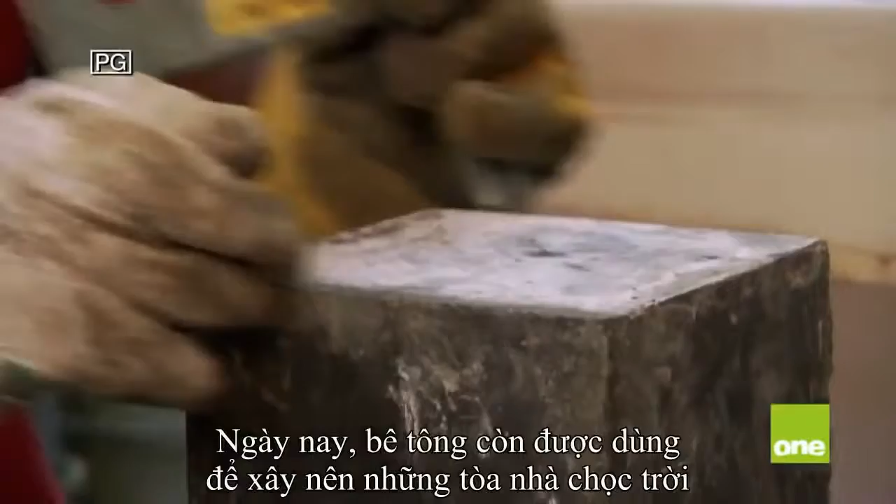Concrete. It's the most used building material on Earth. It was the building block of the Roman Empire. Today, it's the material for a new generation of gravity-defying skyscrapers. The raw ingredients that create this magic formula can be found in nearly every country on Earth.

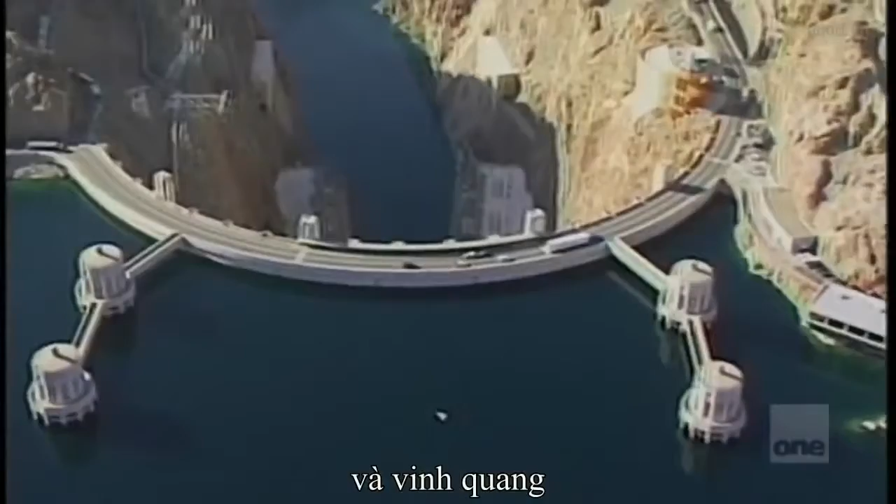Yet how these simple components are mixed together can make the difference between tragedy and triumph. From the mundane to the massive. From the ordinary to the extraordinary. Concrete helped pave the way for innovation and laid the foundation for the world's greatest civilizations. Now, go inside the science of concrete.

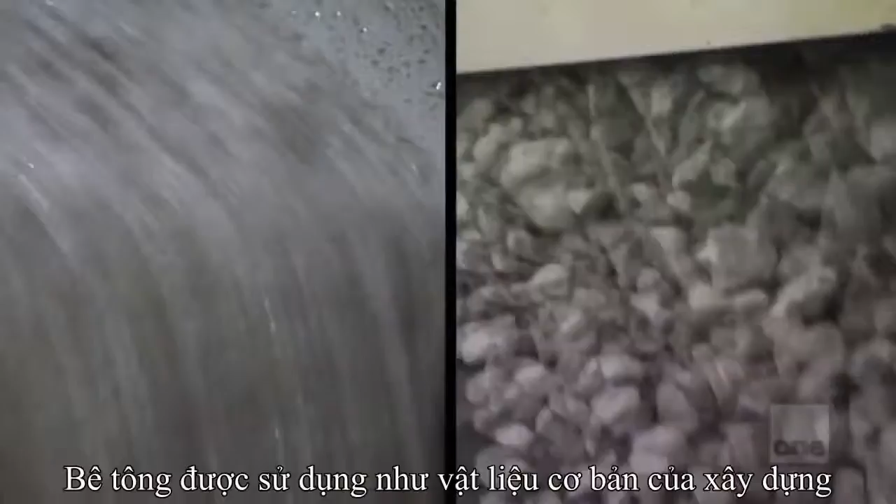It starts out like liquid. When it dries, it becomes stone hard. This amazing metamorphosis has earned concrete the nickname liquid rock. It has served as a cornerstone of engineering for centuries. And it's a highly prized tool of construction for a reason.

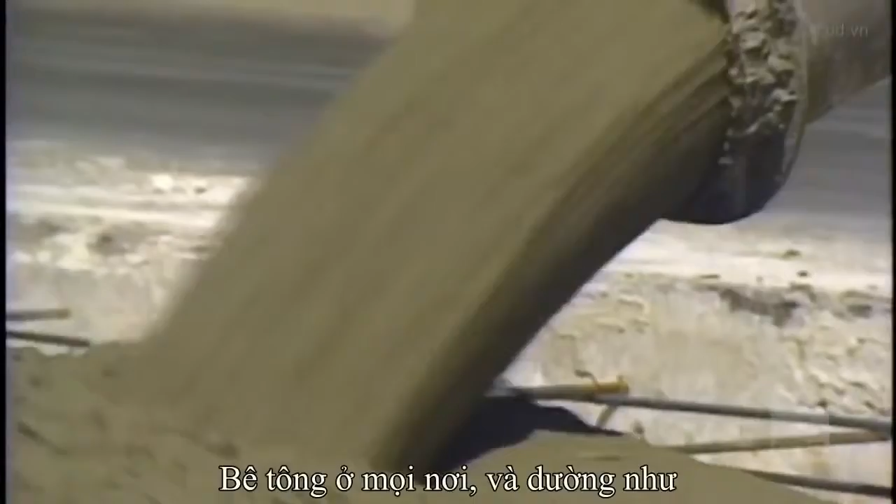It's easy to take concrete for granted. People see it in sidewalks and roads all the time, every day. But in fact, it is the closest thing to a miraculous material in construction that we've ever had. Concrete is everywhere. It has an almost unlimited engineering potential. It can take on nearly any shape and forms the backbone of a variety of the world's construction.

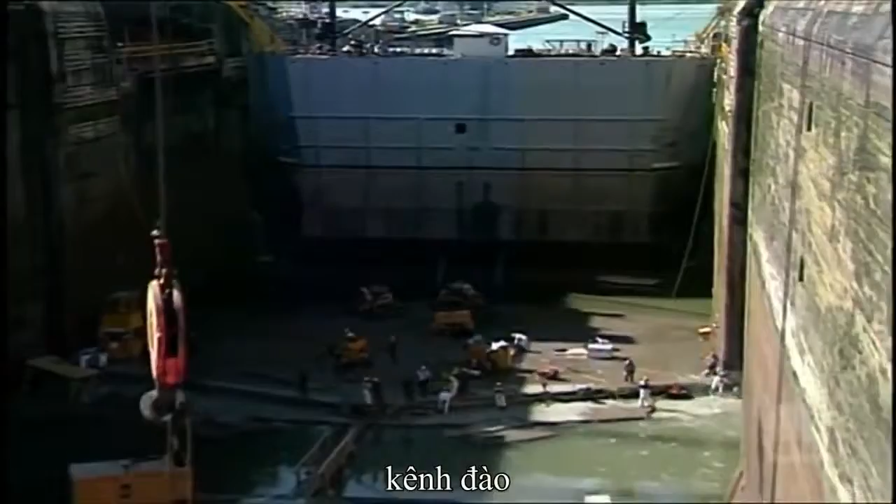Superhighways, massive bridges, man-made waterways, mega dams, the world's tallest skyscrapers. This miracle material begs the question, how does it do it all? I worked on a lot of jobs, and basically they all have a different formula for their concrete. Now I can't imagine the world without concrete.

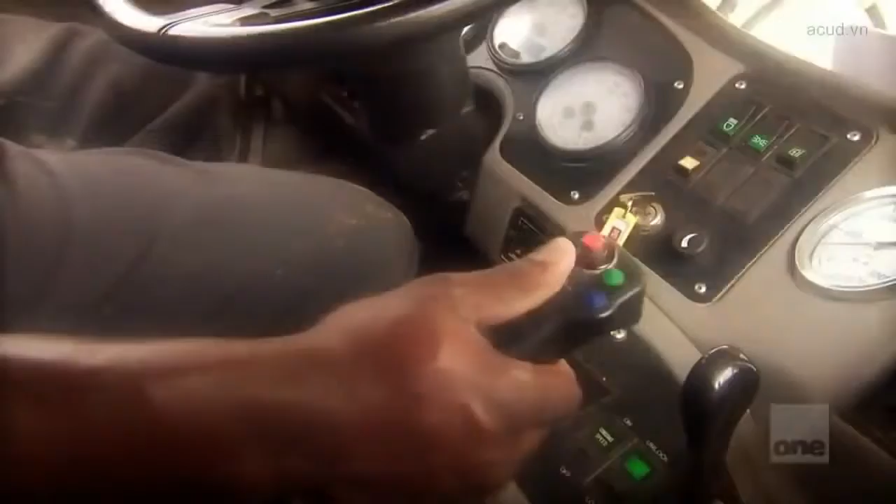The basic formula for concrete is simple. Sand, crushed rock, called aggregate, water, and the heart of the concrete mix, cement. Cement, it is the grey, powdery material that acts as a glue that sticks all of the concrete together. It covers and coats all of the gravel, the sand, and the rock as a way of gluing and binding the whole material together.

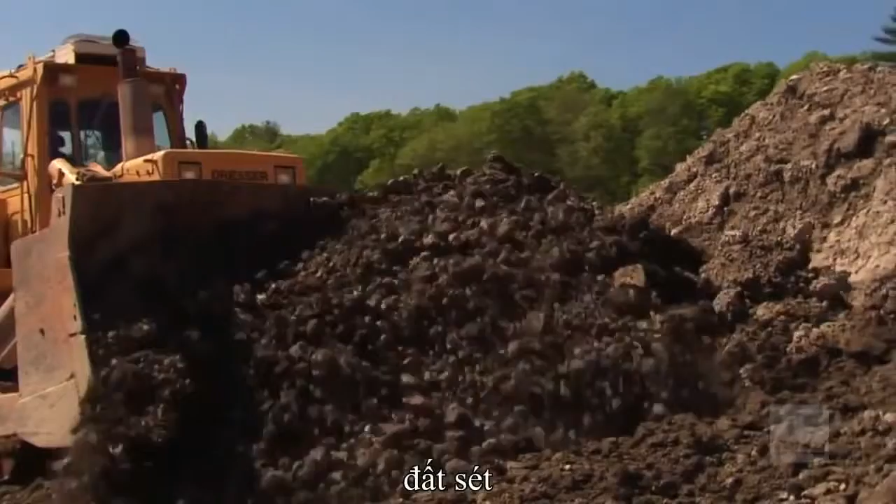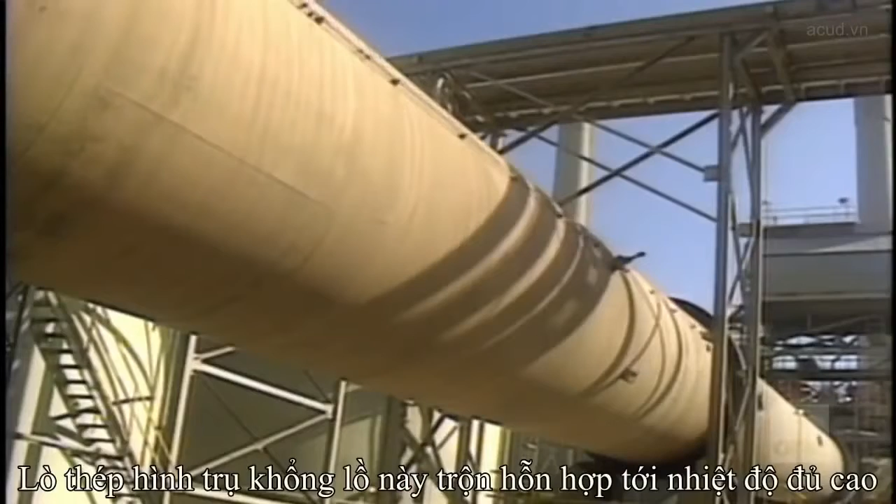To make cement, you need limestone, clay, and other elements like iron. These ingredients are crushed and combined into a powder that's poured into a kiln. The massive cylindrical spinning kilns heat the mixture to a temperature as high as 2,700 degrees Fahrenheit. The mixture becomes partially molten, forming a new marble-sized component called clinker. Once cooled, machines grind clinker into a superfine powder we know as cement.

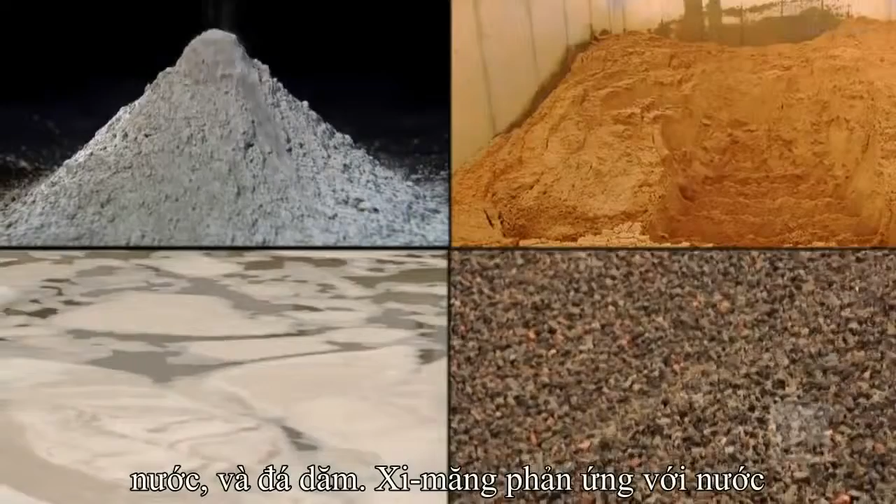Cement binds the ingredients together. When added to sand, water, and crushed rock, the cement reacts, linking the raw elements into one powerful whole. Water is the key. When cement reacts to the water, it undergoes a transformation called hydration. During this reaction, a node forms on the surface of each cement particle. The node grows and expands, linking up with other nodes. It sticks to the crushed rock and sand in the mix. Cement binds these ingredients. As it solidifies, concrete becomes a building block of modern construction.

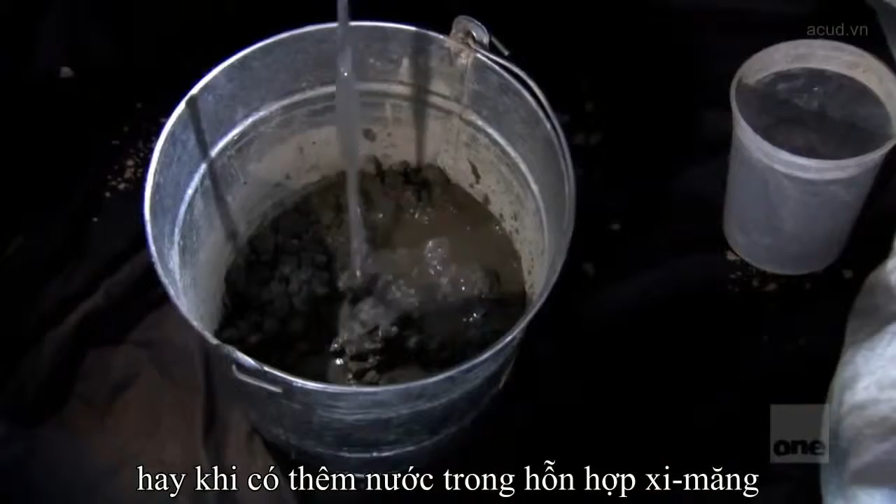The water actually allows a chemical reaction in the cement to allow it to harden. People often think that concrete hardens by drying. It actually hardens by hydrating or getting more wet. The water in the cement mixes with a lot of the minerals and chemicals that are in the cement, and by that mixture forms a new compound which then hardens. This basic process hasn't changed in over a century.

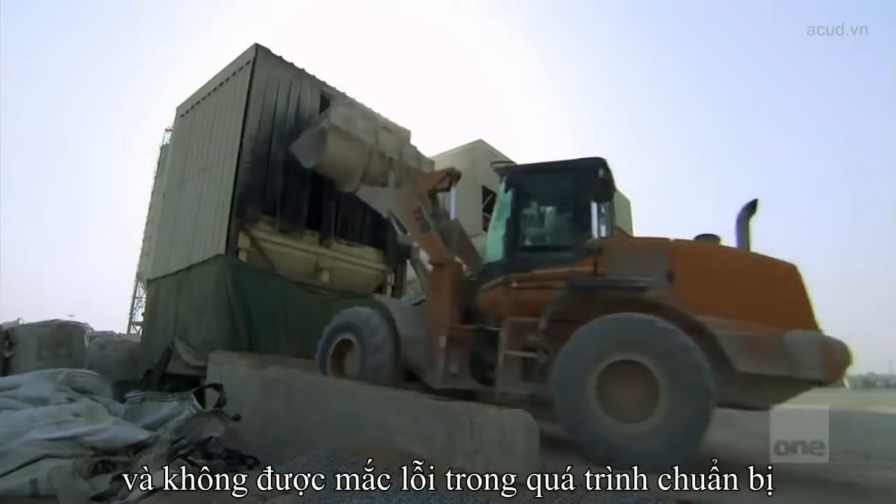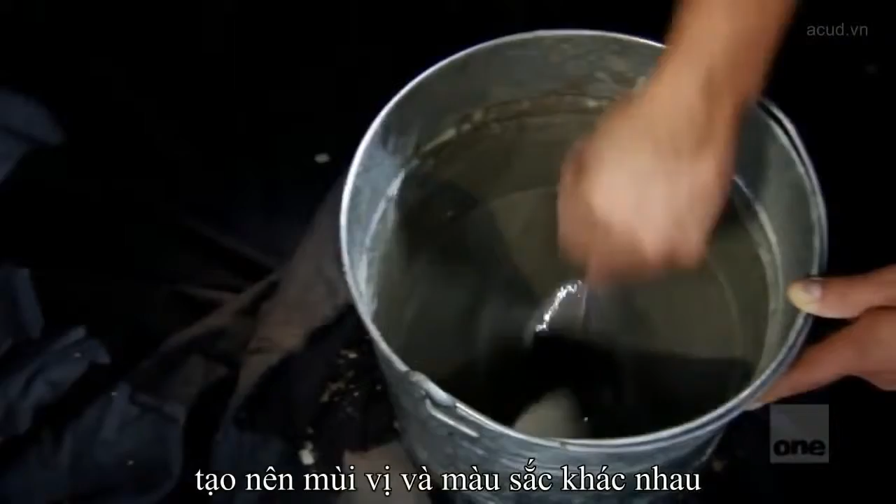But creating concrete is no simple matter. Making the right recipe requires precision and flawless preparation. It is a synergy of ingredients and timing. In a way, making concrete is like making a cake. There are lots of different recipes to make a cake. You get different flavors, different colors, different textures, but there are also lots of ways that you can make a cake wrong. It's not going to set properly, or it can come out in a way that's very different from your intentions. Getting the recipe right is everything, and the consequences of a flawed mix can be deadly.

The residents of Mexico City learned this the hard way. On September 19th, 1985, the Mexican capital is rocked by an 8.1 magnitude earthquake. It causes up to $5 billion in damages. Investigation of the rubble reveals that many of the buildings had been made of a substandard concrete.

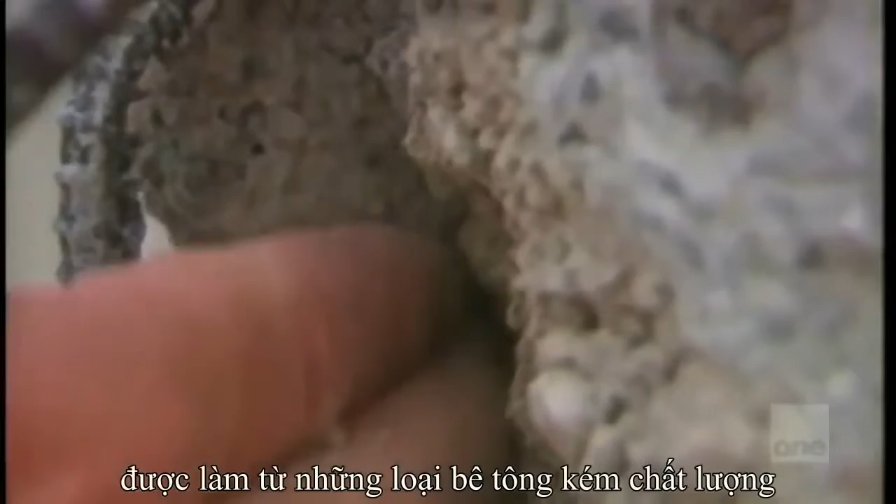Yes, we saw examples after the Mexican earthquake where when you use inferior concrete and you skimp on the rebar, and we saw both extensively in Mexico City, the concrete doesn't have its expected strength. The result is walls would fracture and shear and the building would collapse, when the expectation would have been that the building should have easily survived to preserve health and safety. The consequences of this quake are tragic. An estimated 10,000 die. Another 50,000 are injured.

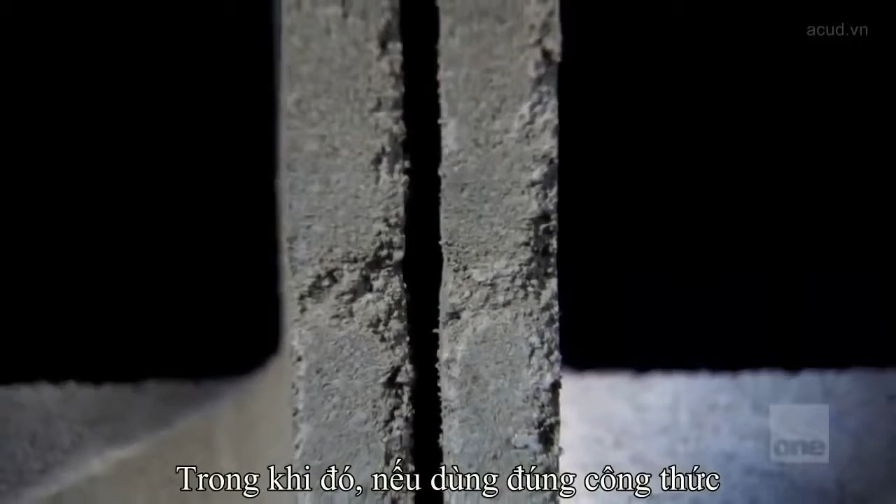But with the right formula, structures made of concrete can endure thousands of years. The ingredients for concrete have stayed the same for centuries. But there has always been room for innovation. With special ingredients and slight adjustments to the formula, concrete can adapt to the challenge of a specific project.

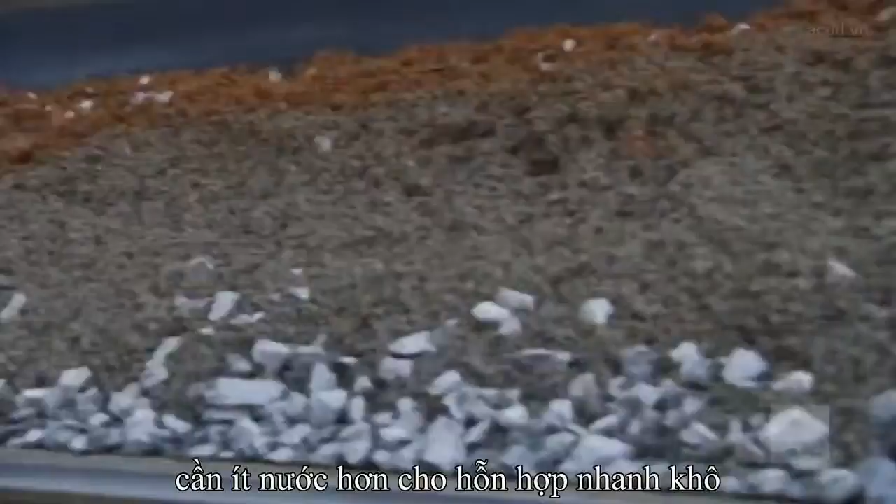Want a dam to hold back 52 million gallons of water? Add more aggregate to the formula to create a concrete with greater density. Want to create the foundation of an epic skyscraper? Add less water for a faster drying mixture. The array of different recipes is virtually infinite.

The hunt for the right formula for a specific project is nothing new. The search for the strongest and most durable recipe goes back thousands of years. Although other civilizations, including the Egyptians, experiment with concrete, the Romans transform it from a supporting material to a main substance. In Rome, liquid rock fuels the dreams of an empire.

The word concrete even originates in Rome. From the Latin concretus, it means grown together or compounded. Roman concrete contains the traditional ingredients of sand, water, and crushed rock. But volcanic ash from the hills of Pozzuoli, Italy, transforms the material.

The Romans were very astute architects and engineers, and they recognized that by mixing volcanic ash from near Pozzuoli in Italy, they were able to get a concrete that became very hard. This volcanic ash proves to be an adhesive binding agent. It gives ancient Rome a powerfully strong concrete.

This innovation allows the Romans to craft an empire from the ground up. Concrete becomes the backbone of a dizzying array of structures, aqueducts, bathhouses, and markets. But today, one structure alone stands as a unique testament to the power of ancient Roman concrete: the Pantheon.

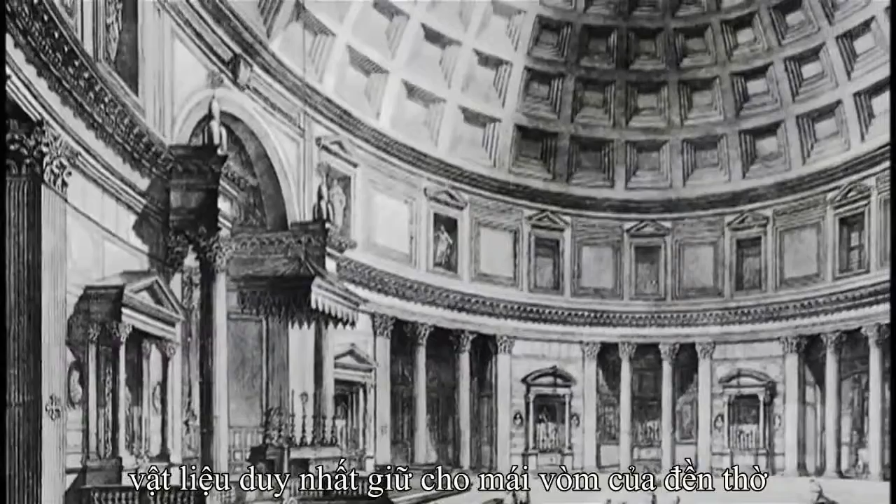This former temple to the Roman gods combines elements of engineering and design, and nowhere is that more apparent than in this concrete dome. Stretching 142 feet in diameter, it is the largest surviving dome from the ancient world. It was the largest dome in Western Europe until the 15th century. Unlike modern-day domes, which are generally reinforced, the only material holding the dome of the Pantheon together is Roman concrete.

Constructing an unreinforced concrete dome on the scale of the Pantheon is just an incredible engineering achievement. You couldn't do something today because everybody would have appraised the odds of your success as so small as you would never get a chance to do it.

There's actually 7 different types of concrete used in the construction of the Pantheon Dome. And the way they distributed their aggregate and changed the composition of their concrete so that the areas that had to take tremendous compressive loads, like the weight of the dome at the base, the aggregate is huge, 9, 10-inch rocks. But as the dome gets near the top, of course, there's less weight, so they switch over to pumice. Near the top ring is very high pumice content, almost 80, 90% pumice to make it lighter.

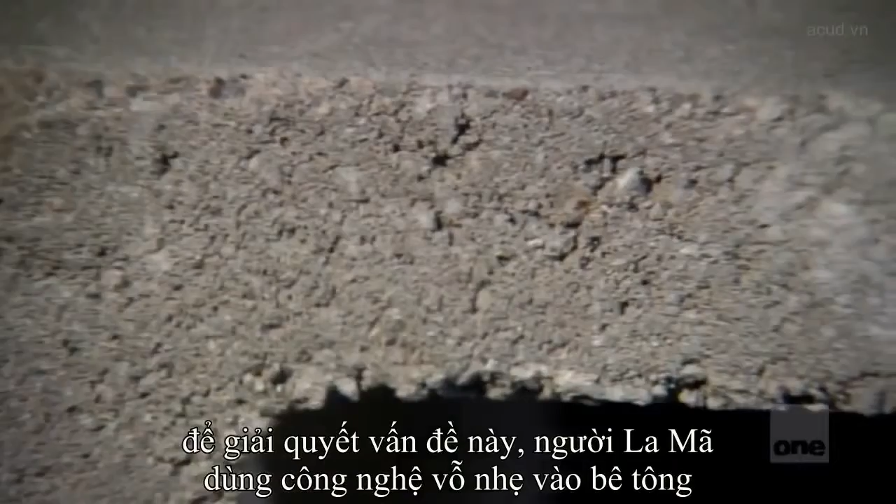It is the Romans' ability to modify the formula for each stage of the dome's construction that allows it to stand to this day. The Romans also faced an immense engineering challenge: air bubbles. Pockets of air can form in the concrete during a pour. When the water dissipates, these holes can lead to cracking. To solve this problem, the Romans tamped or tapped the concrete, avoiding the need for excess water. By removing the air bubbles, the Romans increased the dome's strength and stability.

The Romans also wanted to reduce the overall stress on the dome. To do this, they created sunken panels called coffers. These panels are decorative, but also take weight off the dome. They are a synergy of architecture and engineering.

However, there is one feature that stands out in the Pantheon's design. The dome's interior was designed to look like the Roman heavens. It features an interior circle called an oculus, or great eye, representing the sun. 27 feet across, the oculus is the source of all light for the Pantheon.

The oculus reduces the amount of weight and stress at the center of the dome, giving the whole structure added durability and strength. It is an engineering marvel. The dome of the Pantheon is a stunning example of how Roman concrete could be built to last.

Each layer of the dome becomes less dense the closer it gets to the top. At its weakest point, the Romans designed an oculus which reduced weight and stress. These innovations continue to impress engineers almost 2,000 years later. For 1,500 years, that was the largest dome ever built by man. There aren't many engineered structures that stand that kind of record of time.

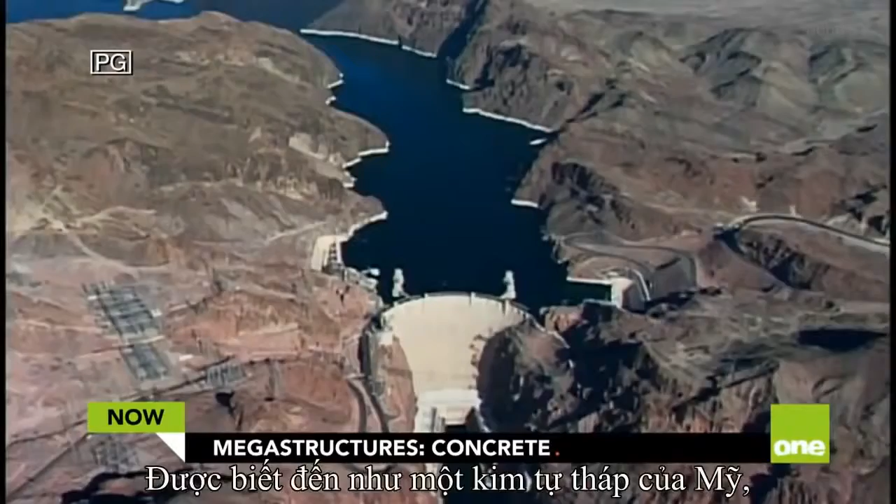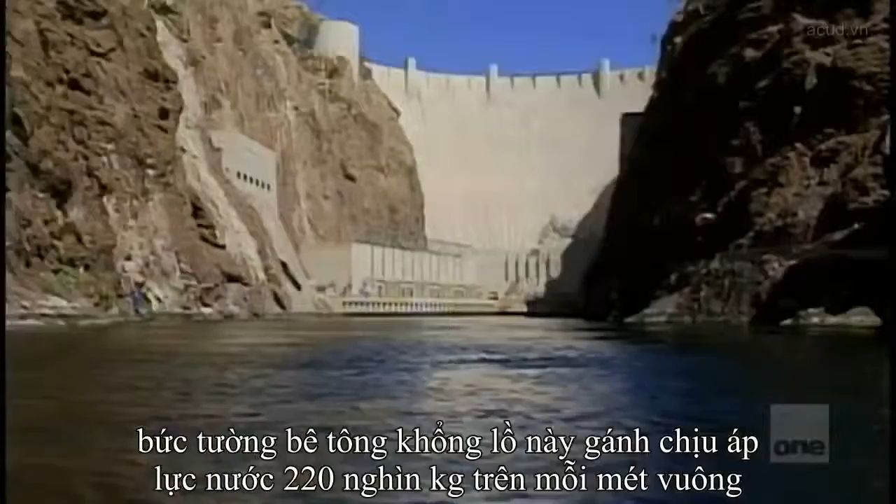It has been called an American pyramid. The mighty Hoover Dam is a testament to the power of concrete. Weighing 6,600,000 tons, this concrete colossus holds back 45,000 pounds of water per square foot. The force of this water generates hydroelectric power for over 1 million people.

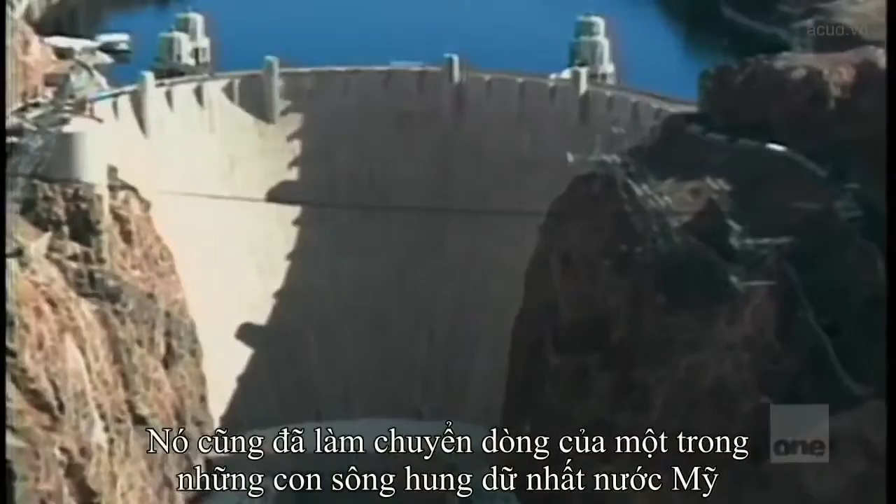From the neon lights of Las Vegas to the freeways of Los Angeles, this hydroelectric dam generates 2,080 megawatts of electricity. The Hoover Dam's construction redefined what the world could do with concrete, but it also rerouted one of America's wildest rivers, flooding ancient canyons, reshaping the area's natural habitat.

In 1905, the Colorado River breaks free of a man-made canal. It floods Lower California across 150 square miles. Epic floods wipe out thousands of farmers. Millions of dollars are lost. The Colorado is unpredictable.

The Southwest also has another problem: power. The boom towns of Los Angeles and Phoenix are growing at a rapid rate and desperately need energy. Raging floods and lack of power. Two different problems. But engineers believe there is one answer to both: dam the Colorado River.

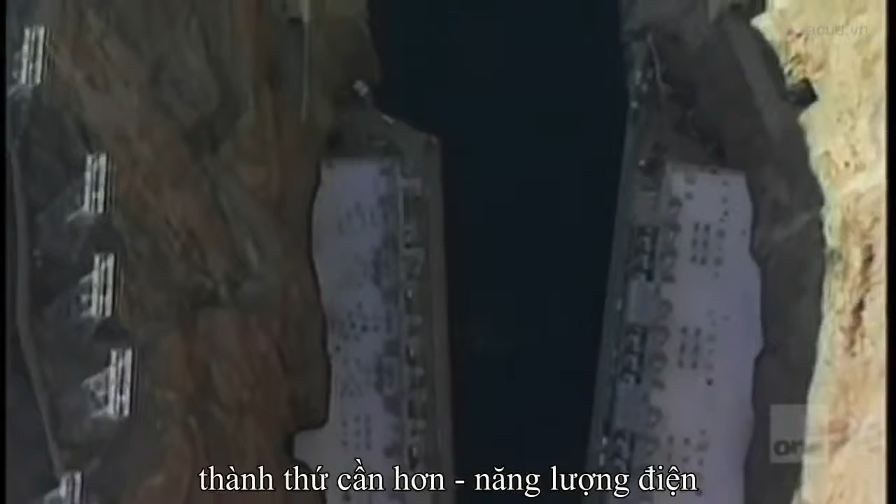A hydroelectric plant would harness the natural power of the Colorado and, using simple mechanics, convert that energy into much-needed electricity. You're generally looking in the construction of a dam for a huge, solid structure. It's really about holding back enormous quantities of water. The dam needs a material that is strong enough to hold back the raging Colorado. And since the location would be remote, able to be made on site.

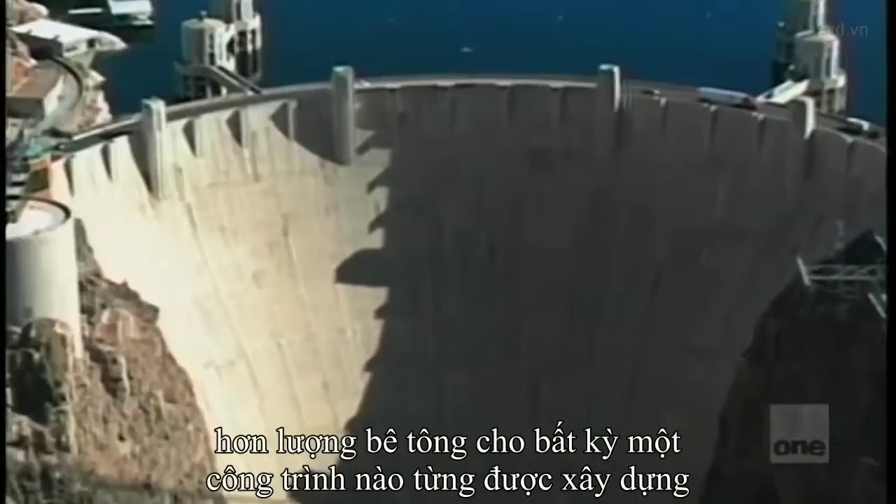One material can meet all of those requirements. It's hard to imagine the Hoover Dam being built out of any material other than concrete. Using steel on this scale would be too costly. But to make the Hoover Dam, engineers would need more concrete than had ever been used before in one project. The dam will be 726 feet high and 1,244 feet wide.

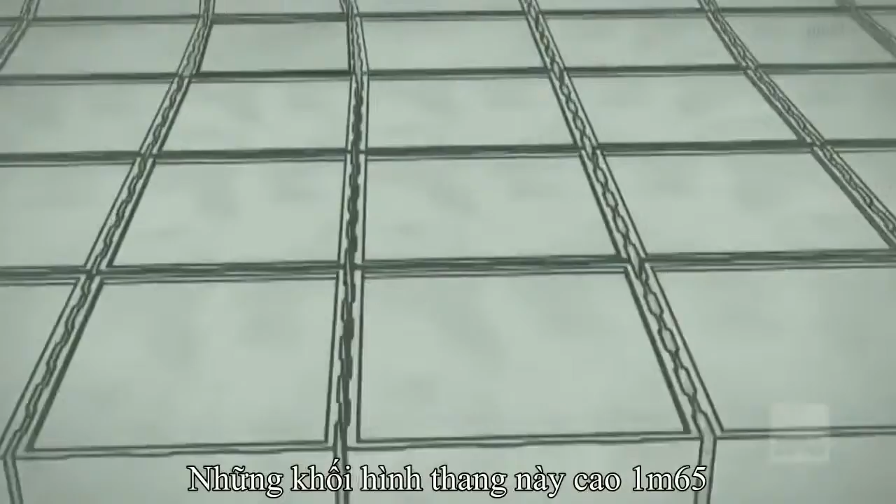With a structure this big, it will be impossible to do one massive pour of concrete. The amount of material that went into this dam was so enormous that there's no way to pour the concrete in one segment. So what they did is they divided the whole dam into lifts and then into individual blocks. The Hoover Dam needs to be built as a series of individual blocks that will interconnect. Trapezoidal in shape, the blocks rise in 5-foot lifts. This crucial engineering element allows the project to progress in stages.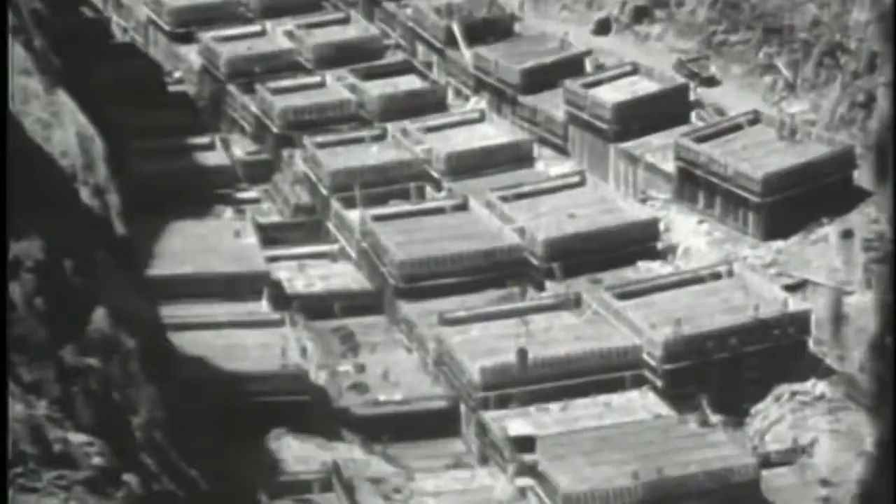Something on that scale being built in concrete had not been built before. Hundreds of pounds per square inch, thousands of pounds per square foot on the base of the dam, trying to push the dam downriver. And now you've got the Hoover Dam to stand this incredible water pressure trying to push it down the river. Chief Engineer Frank Crowe knows the completed dam will have to hold back 45,000 pounds per square foot of water. For this, they need a special high-strength formula.

Crowe's solution? A minor but crucial modification to the standard concrete formula. A very dry mix, one that uses less water. More water makes it more workable, but shrinks more, and shrinkage causes cracks. The less water, down to 7%, the better and stronger the concrete.

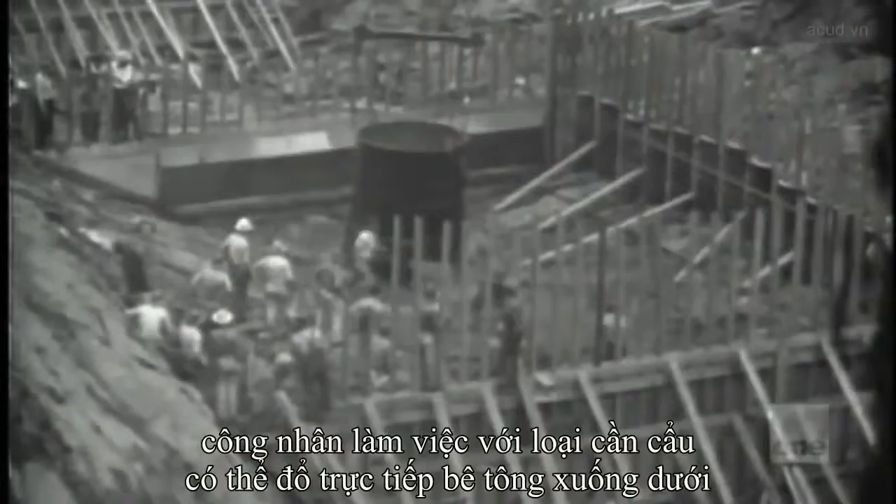The dam's remote location also means crews will have to build 2 concrete mixing plants on site. Shipping a very dry concrete formula from a facility far away would render it useless by the time it's transported to the dam. Because speed is of the essence when working with a very dry concrete mix, the crews working the pouring cranes have to push themselves to the limit to pour quickly and accurately.

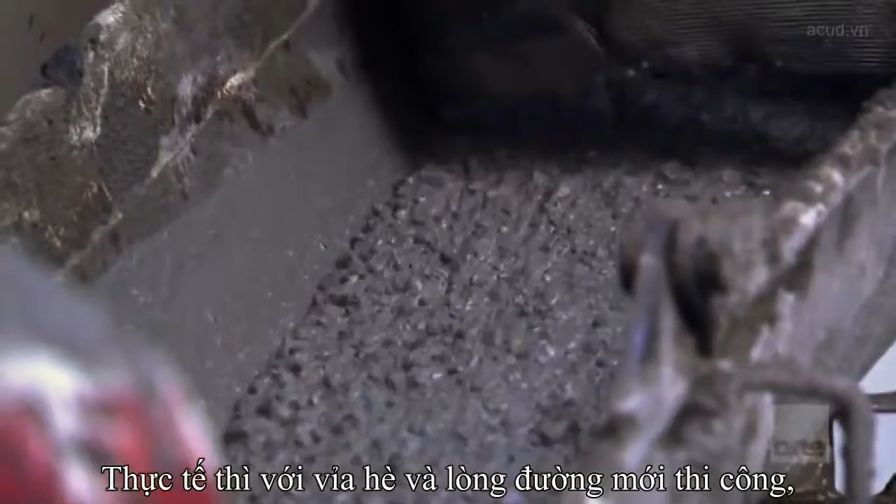Now go back inside the science of concrete. The process by which concrete cures, we call an exothermic reaction. By that I mean it gives off heat. And indeed, if someone pours a sidewalk or driveway around you, right after the slab dries enough to touch, put your hand on it. It'll feel warm. That's exothermic, it gives off heat. You can feel sensible heat.

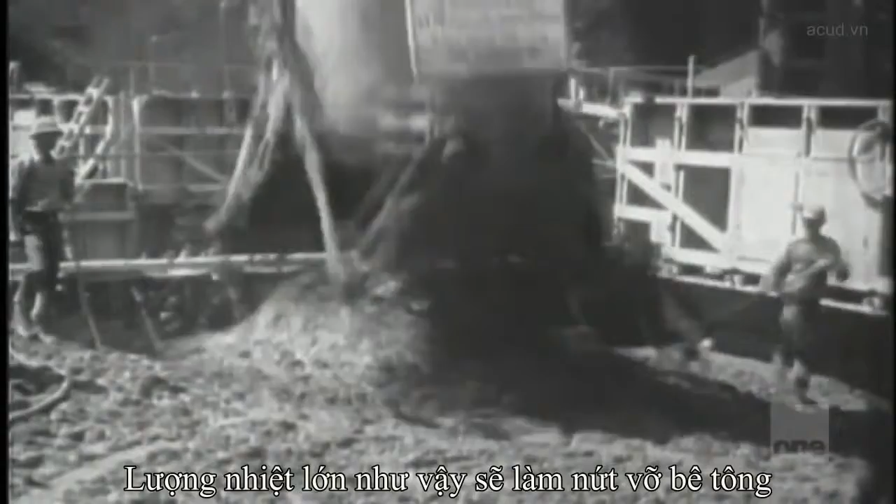As the amount of concrete going through this chemical reaction gets bigger and bigger, the amount of heat that's given off gets bigger and bigger. Engineers calculate that if the dam were built in one continuous pour, the concrete would get so hot that it would take 125 years for it to cool to normal temperatures. The extreme heat would also cause the concrete to crack and crumble away.

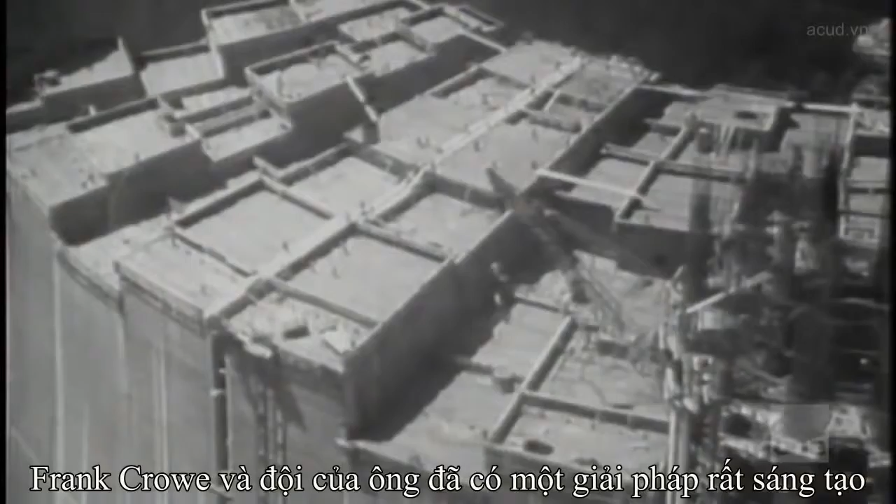Concrete dries from the outside in. If the concrete is not evenly cooled, it can crack, putting the stability of the whole structure at risk. Instead, Frank Crowe and his team of engineers have an innovative solution. Each block is outfitted with coils of thin-walled steel pipe. When the concrete is first poured, water from the Colorado River circulates through these pipes.

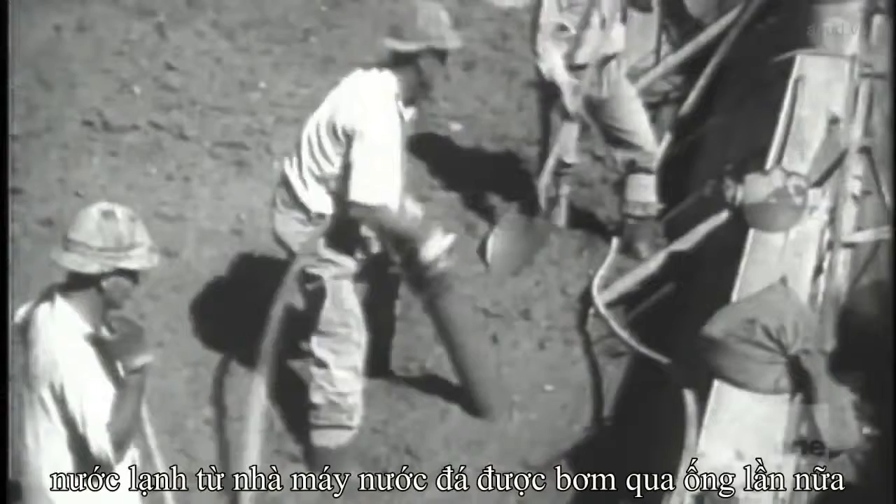The idea is to initiate a cooling process, but one done in stages. Cooling the concrete too quickly will cause it to crack. After the concrete has received its initial cooling, chilled water from a refrigeration plant is circulated through the coils to finish the cooling process. As each block is cooled, the pipes are cut off, and they are filled with grout by pneumatic grout guns, pumping 300 pounds per square inch of filler.

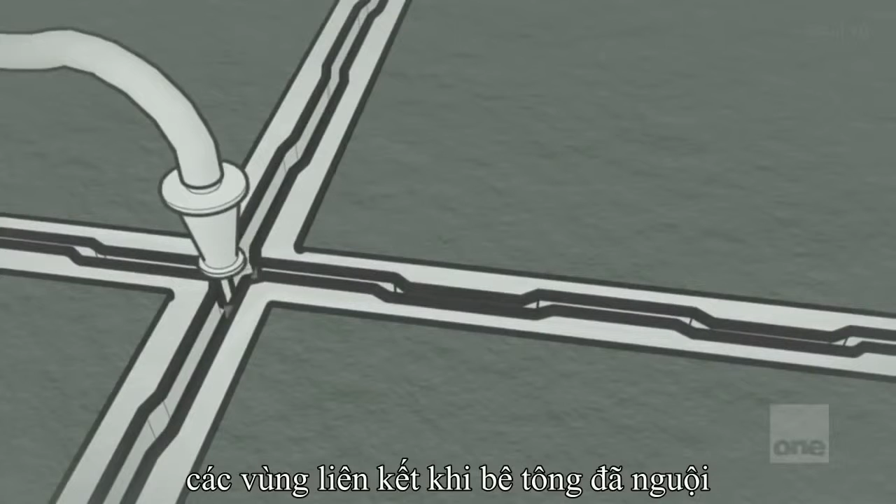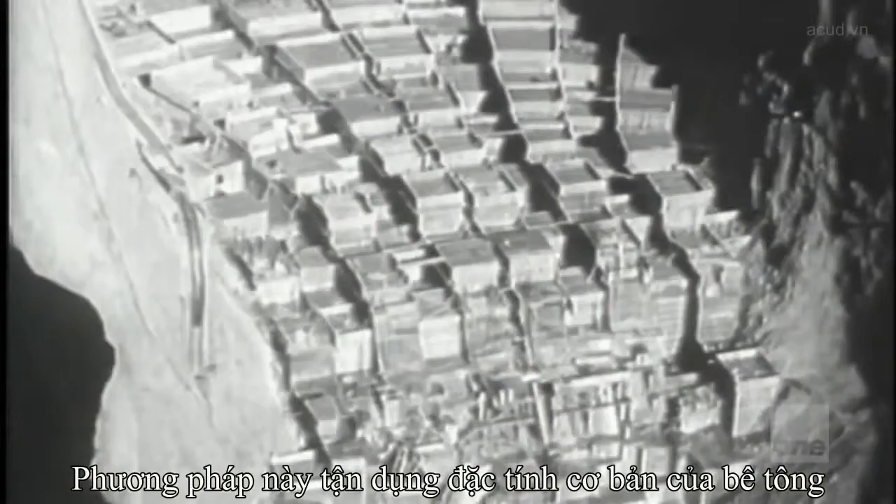Once the individual blocks have cooled and set, there is one final challenge. In order to prevent the hairline fissures between the blocks from weakening the dam, the individual blocks are formed with vertical interlocking grooves. When the concrete has cooled, grout is forced into these joints, bonding the entire structure into a monolithic concrete giant. This method takes advantage of one of concrete's fundamental properties. Concrete as a material is very strong in compression.

To build a structure, to make sure that the concrete is all in compression, you bend the beam like this, so now the water pushes on an arch. Well, what's the water trying to do? It's trying to push that through. Well, it's the Pantheon Dome again. Only this time it's the water trying to do it. It's trying to push the dome through the river gorge. What that does is put the whole structure in compression.

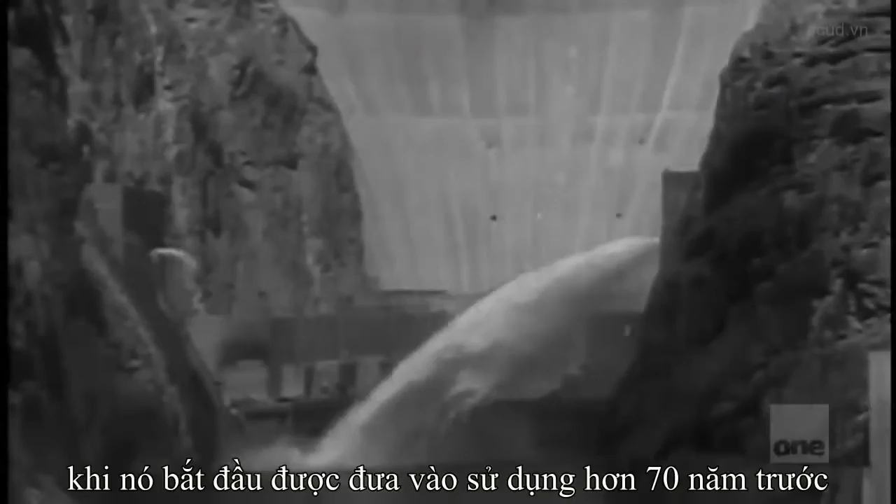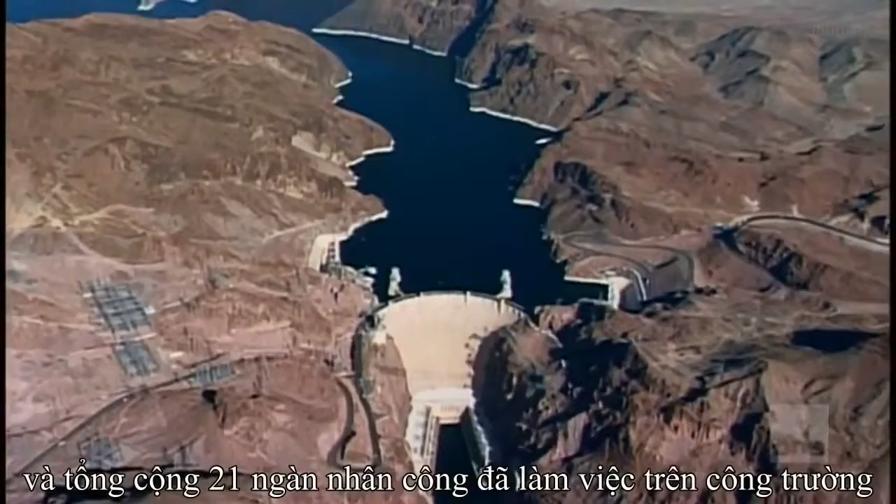Well, concrete loves compression. The more it is forced together while setting, the stronger concrete becomes. As a result of this property, the Hoover Dam is arguably stronger today than it was on opening day, 70 years ago. The Hoover Dam is a testament to engineering know-how and a skillful use of concrete. The dam contains enough concrete to pave a strip 16 feet wide and 8 inches thick from San Francisco to New York. More than 5 million barrels of cement were used in the Hoover Dam, and a total of 21,000 men worked on its construction.

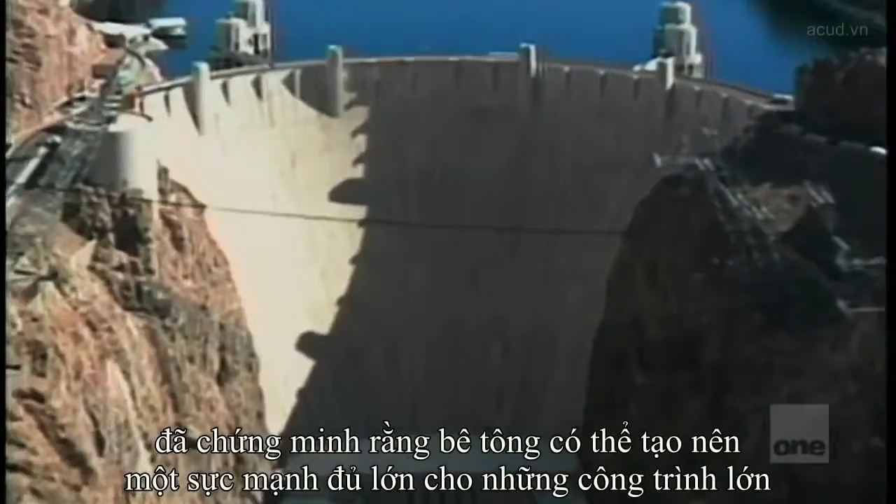And it represented an enormous engineering achievement to build successfully. It took the lives of over 100 men to build that dam. Today, the concrete mega dam is nothing new. But Hoover set the stage and showed the world that concrete could do the job and help generate much needed power. It changed the course of one of America's wildest rivers. Now the question is, can concrete conquer the skies? Now go back inside the science of concrete.

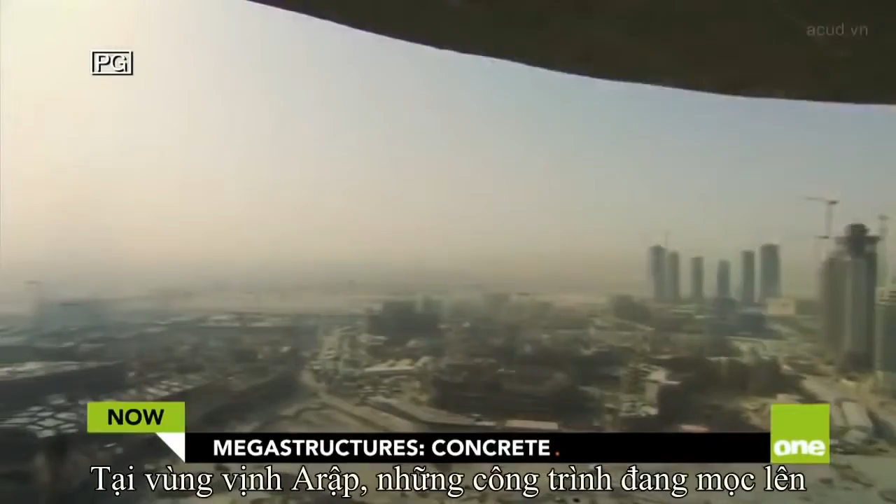In the scorching Arabian Gulf, a growing structure cuts the horizon. Its expected height is a closely guarded secret, but experts around the world agree the Burj Dubai may be the world's tallest skyscraper. It'll be the tallest building, for sure, the overall title holder for some time to come. A construction project this massive needs 11 cranes and the world's fastest high-capacity construction elevators. The building rises at the breakneck pace of 1 floor every 3 days. And from the walls to the floors, to the columns to the stairs, much of this desert skyscraper is concrete. More than 160,000 cubic meters of it.

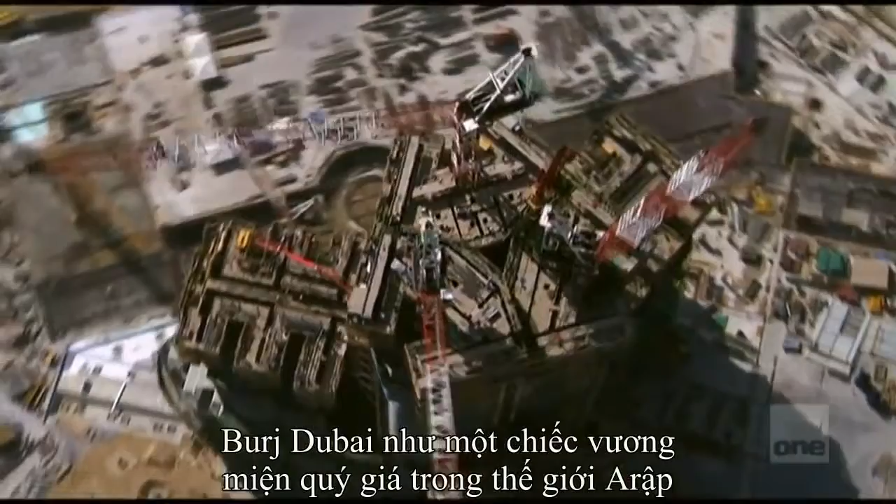At more than 2,000 feet, the Burj Dubai will be the crown jewel of the United Arab Emirates and is a shining example of a new generation of skyscrapers that seek to dominate the skies. It is a far cry from the humble beginnings of the concrete skyscraper, more than a century ago. At the beginning of the 20th century, the building material of choice was not concrete, but steel. You can build a hell of a skyscraper with steel. In fact, the Empire State Building is so overbuilt, you could probably add another 30 stories to it under today's building codes, and it would still comply fine.

So steel was a great material. You can build a great building from steel, but it's an expensive way to go. And steel is not only costly, but represents a challenge for a new generation of skyscrapers that grow increasingly higher. And if you're going to go tall, the building's got to be stiff. It is so much easier to make those thick, stiff walls from reinforced concrete than steel that it's a no-brainer. The Petronas towers in Malaysia are concrete, and this new one in Dubai is going to be concrete. If you're going to go that high, it's going to be concrete.

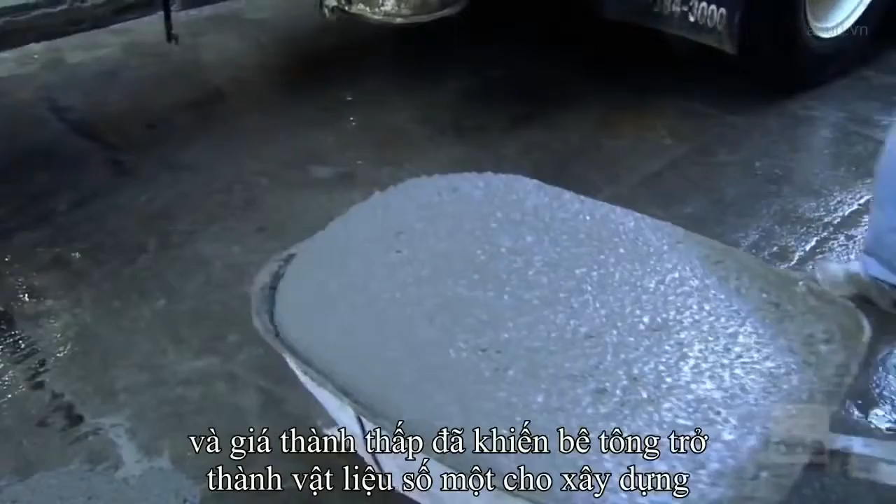The stiffness of concrete, combined with its availability and relatively low cost, have made it the building material of choice for these new skyscrapers. As our experience and comfort level with reinforced concrete came along, and as the buildings started getting taller, reinforced concrete really became the material of choice.

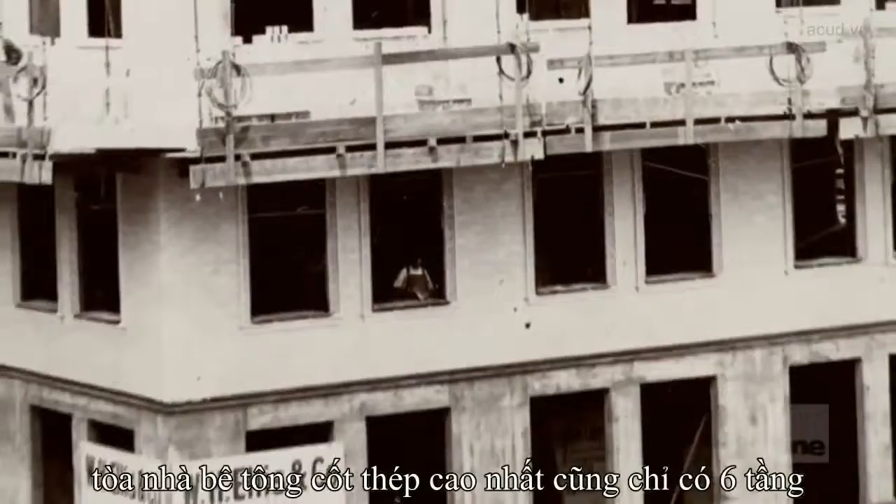Before 1902, the tallest steel reinforced concrete building is a paltry 6 stories tall. The Ingalls building in Cincinnati changes that. Engineer Henry Hooper dreams of a monolithic building of concrete, a skyscraper 16 stories tall. But many engineers believe that a concrete tower 16 stories high will collapse under strong winds or even its own weight. When Hooper finishes his building, there are many skeptics.

There's one anecdote that says that a reporter actually stayed up all night waiting for the Ingalls building to collapse because he was so certain that it was going to. Needless to say, the reporter was disappointed in the end. It is a towering success for its time. But at 180 feet, it is just one in a dizzying array of modern-day skyscrapers. More than a century later, the towering dream of Dubai aims to be over 10 times the size of the Ingalls building.

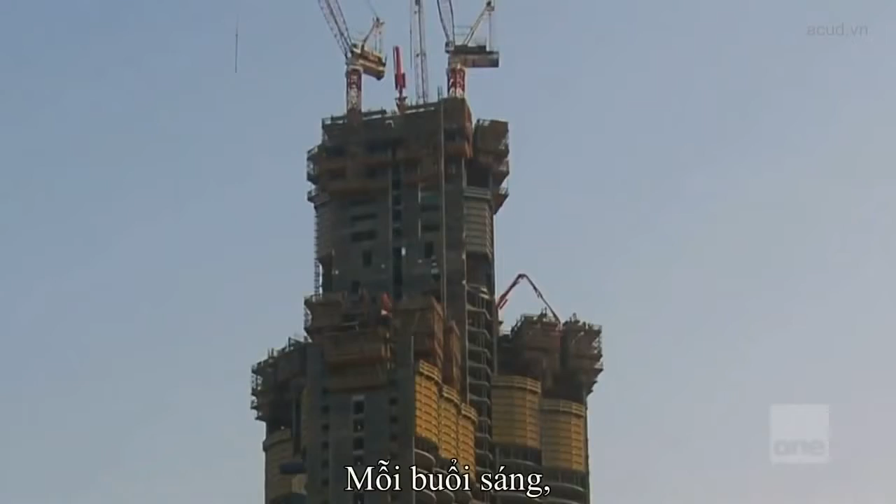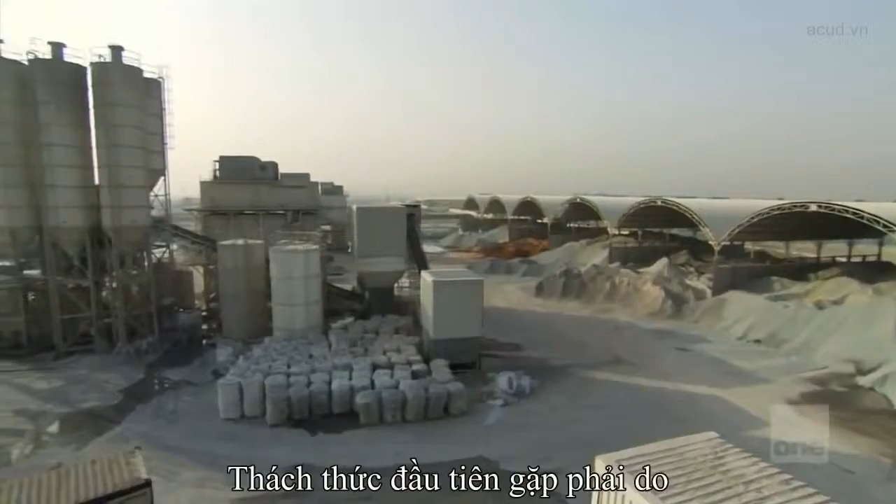Every morning, workers assemble in the garage of the building. Erecting this much concrete in the punishing heat of the Gulf requires serious manpower. But before workers can pour a drop, the perfect formula needs to be mixed at the batch plant. The first problem this leviathan from the desert faces is its own height. The taller a building, the more it flexes, increasing the likelihood that it could flex to the breaking point, a deadly proposition. Older skyscrapers like the Empire State are safe because they use massive steel beams and braces. But erecting a tower nearly twice as high requires a material with even greater shock-absorbing qualities.

If you take something like the Empire State Building and the wind blows on the Empire State Building, well, the wind creates pressure, which are going to try and bend the Empire State Building over. But as you go higher, imagine now going twice the height of the Empire State Building. The wind gets more surface to work on. Indeed, buildings collapse when the flex is so great that the weight of the building gets outside of its footprint and the building doesn't have strength enough to handle that. Down it comes. Now go back inside the science of concrete.

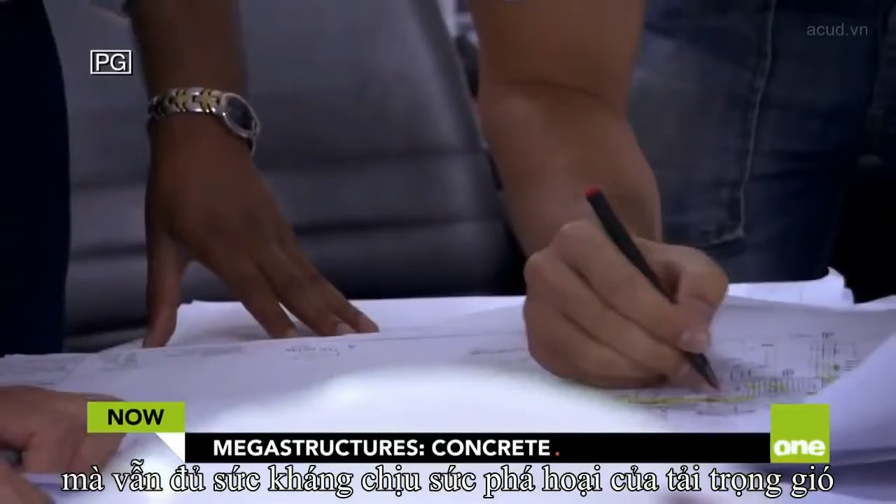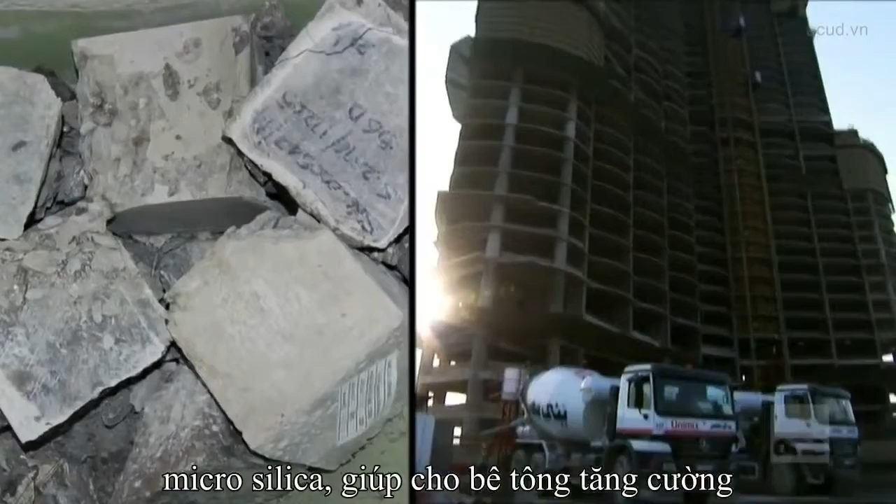Builders will need a formula that is almost as strong as cast iron, yet more resistant to damage due to vibrations from the wind. After extensive computer and wind tunnel testing, the architects behind the Burj Dubai will use a high-strength concrete formula. It contains slag, a byproduct of the steel industry, and microsilica, which gives the concrete added strength. If you look at the microstructure of concrete, there are many, many spaces between the particles that are either hollow, so we call them pores, or they are filled with water. Microsilica plays the role of filling these pore spaces, and therefore it makes concrete much more dense, more durable, and stronger.

And in order to make sure that the formula is consistent, Alam Feroz, quality control manager for the concrete of the Burj Dubai, routinely tests the concrete before it is used in the skyscraper. I'll give you an example. It's like if you're giving blood to a patient, how important is the blood to be tested before you give it to the patient? It's a big risk. So same is with the concrete. When it has been tested, I get confident that whatever I'm giving to the structure has been tested and it complies to the requirements. It won't be just a mere guess.

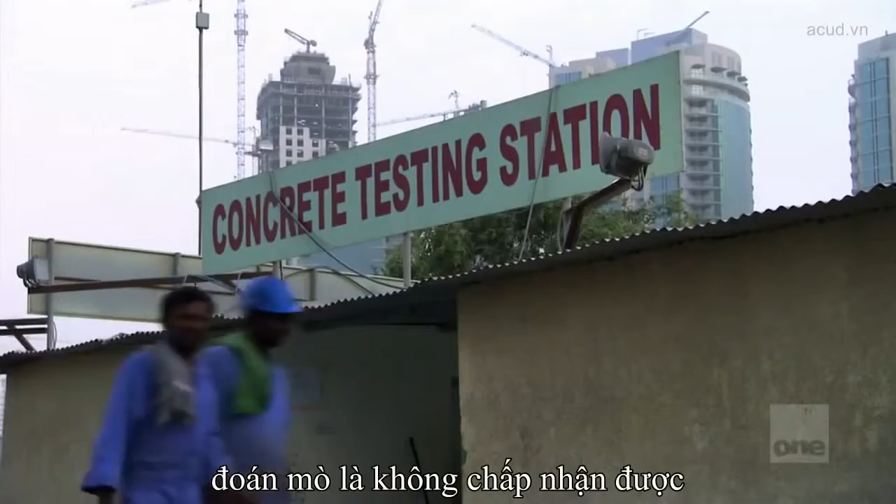To test the strength of the concrete, small cubes are hardened in cool water. Next, the concrete is deposited into a crusher for a stress test. This cube holds up to nearly 14,000 pounds per square inch, making it a high-strength concrete. The concrete test has been successful. But as strong as this formula is, it still has to contend with desert heat.

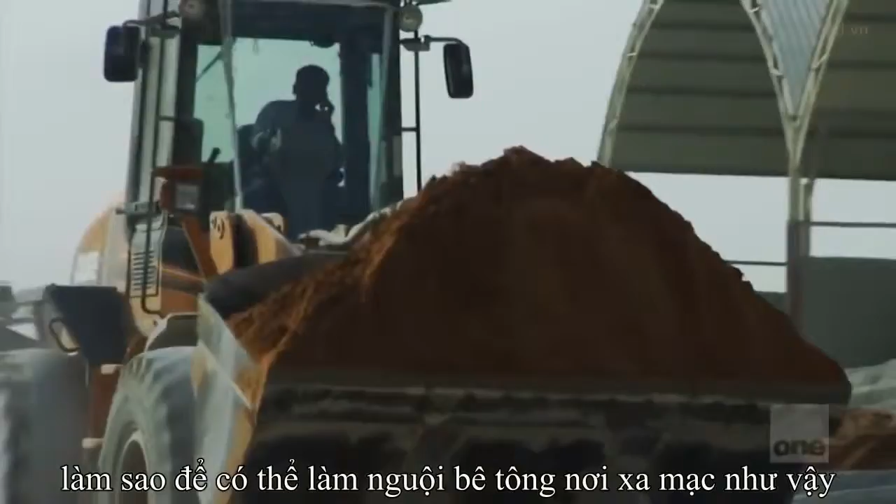Temperatures top 120 degrees. How do you keep concrete cool in the desert? Builders use a deceptively simple technique: shaved ice. While it's being mixed at the batch plant, slices of ice are mixed into the concrete so that it remains cool inside of the mix trucks. When it arrives at the building site, the melted ice has kept the concrete from overheating.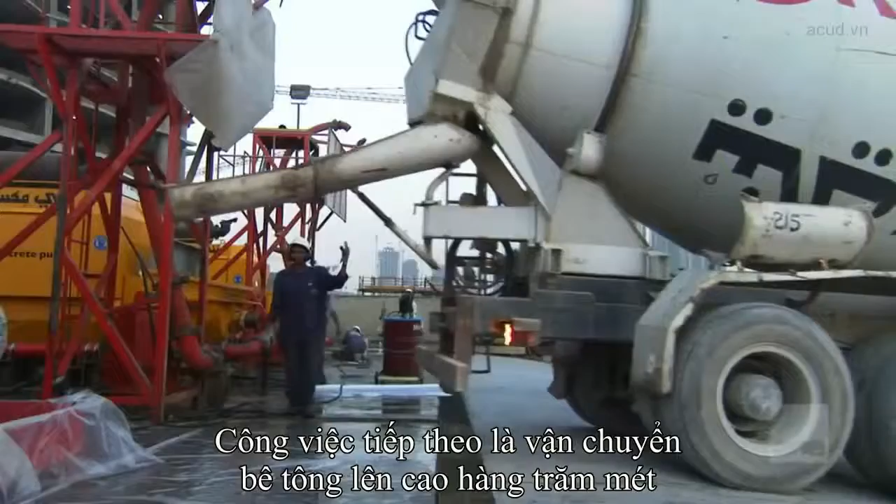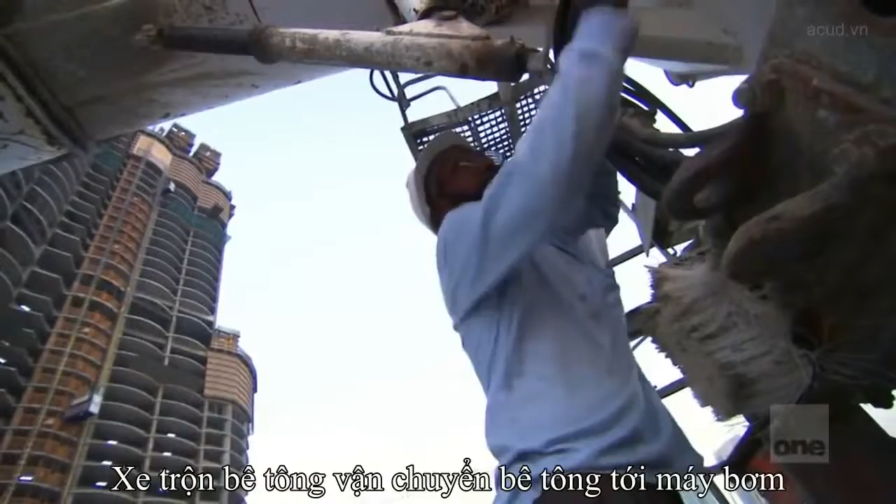But now, the concrete has to travel hundreds of feet into the air. The key technical problem for building a building of this size and of this height is going to be to vertically pump concrete of the order of 2,000 feet high. It takes huge amounts of pressure. Mixer trucks deliver the mix to the pumps. The building requires 3 pumping stations where the liquid concrete is poured. The high-pressure pumps force the concrete through a complex system of pipes.

Now, the technology to do so is awesome. If you think in terms of water, you have 1,000 feet of hydraulic water pressure. That's a tremendous kind of pressure. Now, concrete weighs 2.5 times as much as water. So you need a piping system that's so much stronger, and also pumps that are so much more efficient to pump concrete up that high.

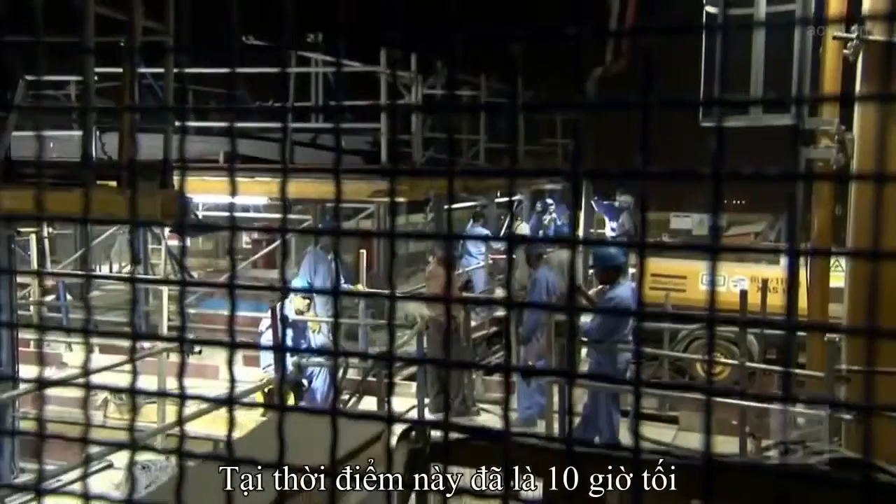As the sun sets, the second shift workers return to feed this growing skyscraper. The concrete pour takes place at night so that the concrete can harden evenly. At the moment, even though it's 10 o'clock at night, it's about 100 degrees Fahrenheit, and the humidity is about 90%. The advantage of pouring concrete in these conditions, because the humidity is so high, we don't have a problem with it drying out the top surface of the concrete, but we've got effectively another roughly 130 stories to go.

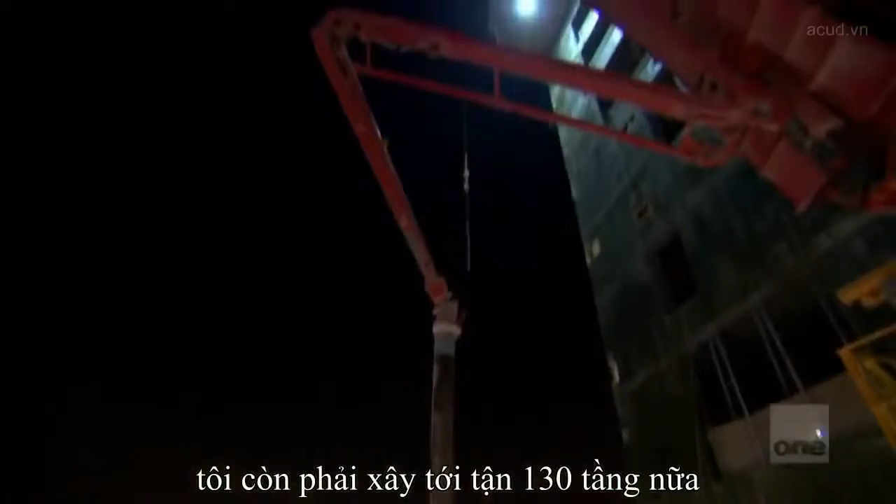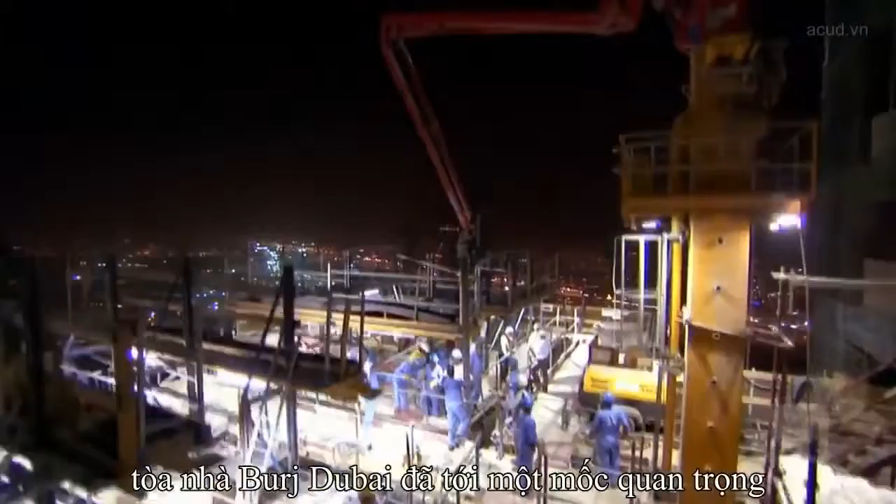As the pour continues into the night, the Burj Dubai has reached a milestone. 25% of the building is done. When completed, this megastructure will stand over 2,000 feet tall, making it twice as high as the Empire State. It will be covered in a reflective glaze to protect it from the extreme heat and high winds of the Gulf. But the building's guts are solidly concrete. When it's finished in 2008, the Burj Dubai will be the tallest building in the world.

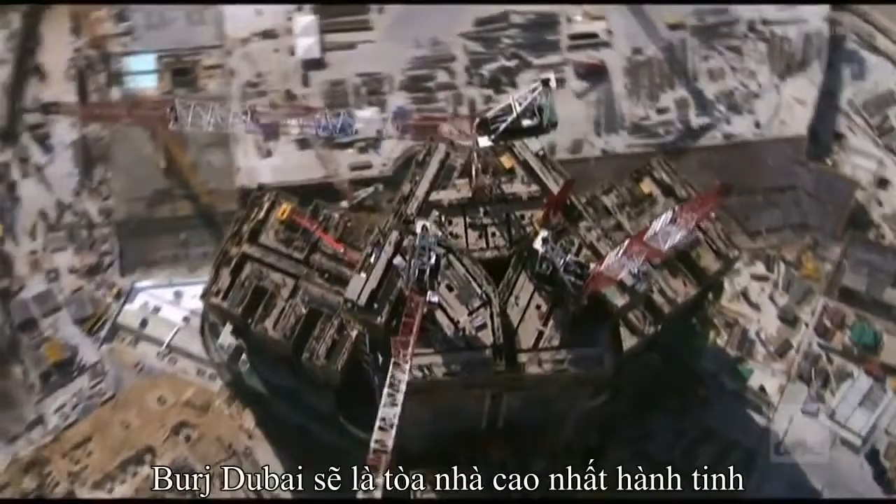Like the Ingalls, the Burj Dubai has set the standard for its day, showing once again that concrete can be used in a variety of ways for the world's tallest buildings. Now, reinforced concrete is establishing itself as a building material of choice for skyscrapers. Concrete has conquered the skies. Concrete's next quest: how to tackle the building challenges of the future. Now, go back inside the science of concrete.

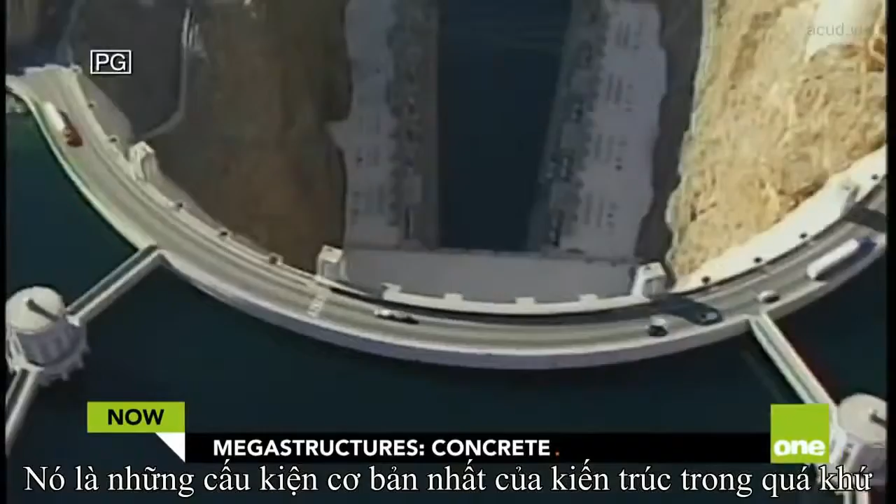Concrete has been a key ingredient in the construction of our civilization. It has been a fundamental part of our architectural past and is now paving the road for our future. Scientists are developing new formulas for concrete and are looking for ways to make it stronger, more environmentally friendly, and capable of doing things we never thought possible.

Back where it all started, at the heart of the Roman Empire, concrete has taken a new and exciting turn. Just a few miles from the Pantheon, the Jubilee Church, designed by architect Richard Meier, uses a new form of concrete. The church was commissioned by the Archdiocese of Rome to commemorate 2,000 years of Christianity. For that, the building would need a material that was both ancient and modern, a material that would speak to the church's past and make a bold statement for the future. They would also need a material that would last the test of time.

Concrete fits the bill. This church is remarkable for several reasons. It has these three sail-like forms, loosely representing the Holy Trinity, but made in effect of giant concrete blocks. The shells of the church, which stretch out and up in the same way as the Sydney Opera House, are made of 346 white, reinforced, precast concrete blocks.

Concrete, for all of its advantages, does tend to pick up discolorations from the atmosphere and so on. Meier, though, wanting to keep his building white, managed to work with local firms in order to achieve this concrete mix that included these photocatalytic particles that will absorb and neutralize the acids in the air. And in effect, what you'll have is a pollution-eating building. Italcementi came up with a revolutionary new formula for the concrete that will keep it as pristine in 50 years as it was on opening day.

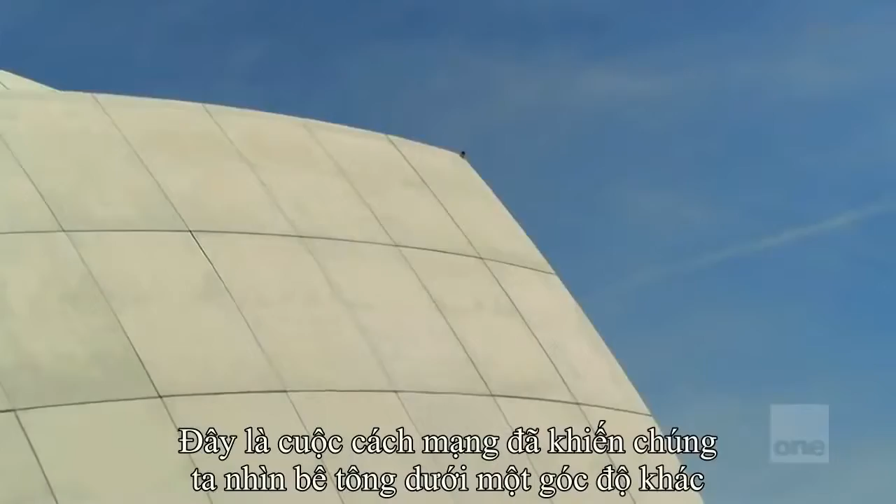This test demonstrates the photocatalytic particles at work. The concrete neutralizes pollutants, allowing it to maintain its brightness and not degrade over time. It is a revolutionary new development that has the potential to transform the way we look at concrete forever.

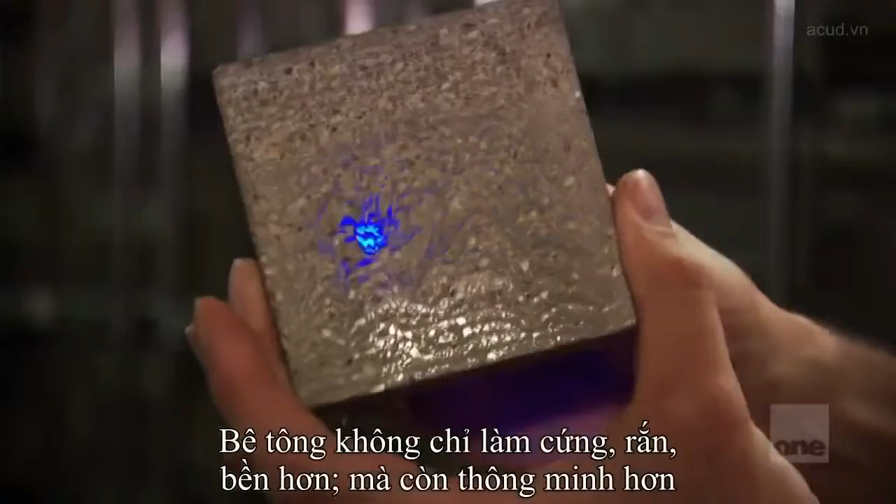Concrete isn't just working harder, it's working smarter. New developments in concrete technology now allow for what used to be unthinkable: helping the environment by using an unusual aggregate: glass. The innovation here has been in making sure that the glass doesn't get corroded by the lime in the

cement mixture. One of the biggest issues with concrete is that the Portland cement tends to be quite corrosive, and this has been a big problem with things like recycled glass. It tends to corrode, the glass falls out. This composition of cement was actually developed by Columbia University. It is a much less corrosive, more benign cement, allowing you to put the glass chips in. So you can actually now have concrete with glass chips that actually has a good surface effect.

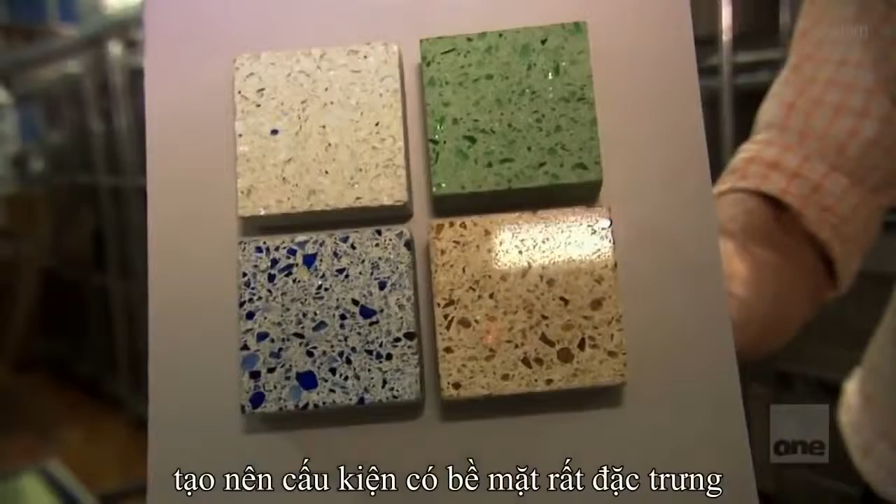We are generating millions of tons of garbage, solid waste, and in New York City, approximately 6% of all solid waste is glass. That's bottles like this, yeah? And these bottles generally find their way into landfills. And that costs taxpayers hundreds of millions of dollars just to get rid of these bottles. Concrete's versatility allows it to bind with other materials, in this case, glass.

The first step is to separate the bottles by color. And then you crush them in a crusher. Now, crushed glass is not something like this. This is what we call broken glass, and that is something you want to handle very carefully. It has sharp edges, and that was also one of the problems we were facing, because skeptics asked, well, if you use glass in concrete, won't people cut their hands by handling the blocks or whatever?

Answer is no, because when you crush the bottles in a high-impact crusher, it comes out in pieces like that, and it's just like sand. It does not have sharp edges. Eventually, the broken glass is crushed into a fine powder. So this is just like powder, like baby powder, the same kind of particle sizes. So if you put this finely ground glass powder into concrete, you can replace part of the cement by this glass.

These are actually 100% recycled glass pieces added into the concrete. Initially, scientists thought that recycled glass would make for a bad aggregate. But Professor Meyer and his team have found a way. Okay, so once you make concrete out of these glass particles and color coordinate that very well, then you can get something like this, and this is now already being commercially produced.

There are also other developments reshaping concrete for the future. For the last 100 years, architects and builders have sought a way to allow light into concrete buildings, homes, and offices in a more efficient manner. One of concrete's biggest drawbacks is that it creates dark buildings that do not effectively conduct light. Experts are working to change this. Okay, this is a piece of light transmitting concrete. It seems like an odd concept, but what they've done here is to take standard concrete and add glass fibers.

Okay, so what you're seeing here is the blue LED passing through the glass fibers that are embedded in the concrete. Imagine concrete allowing light to pass right through it, or for someone to cast a shadow through a concrete block. The same thing can happen with normal daylight as well. So the idea is that you can build a structure with this concrete and allow daylight to actually come through the structural element of the concrete.

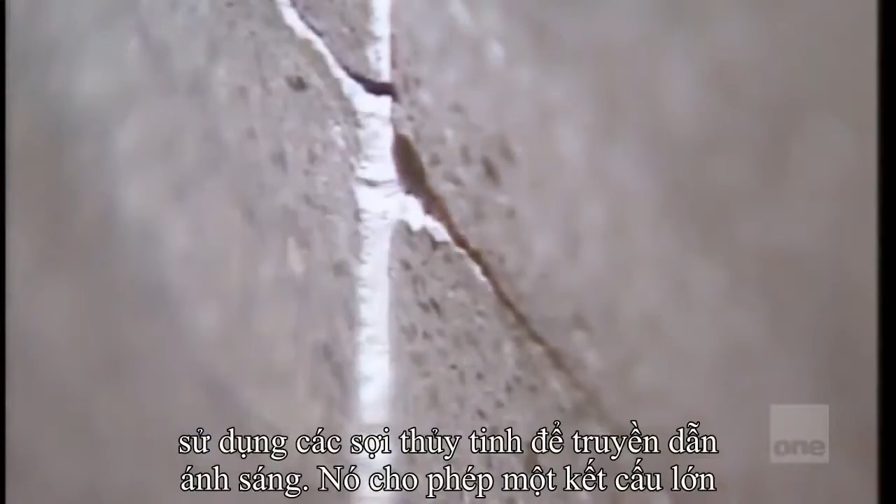Light transmitting concrete, or LiTraCon, is a unique form of concrete that uses glass fibers to conduct light. It allows for massive structures to permit light to shine through. This technology has the potential to redefine what concrete looks like. Once considered cold and impersonal, these new forms of concrete are transforming the material. What started off as the most basic of building materials is now on the cutting edge of building and design.

The future for concrete is virtually limitless. If concrete is anything, it is a material that continuously reinvents itself. Concrete continues to adapt to the emerging challenges of our world and is laying the foundation for our future.